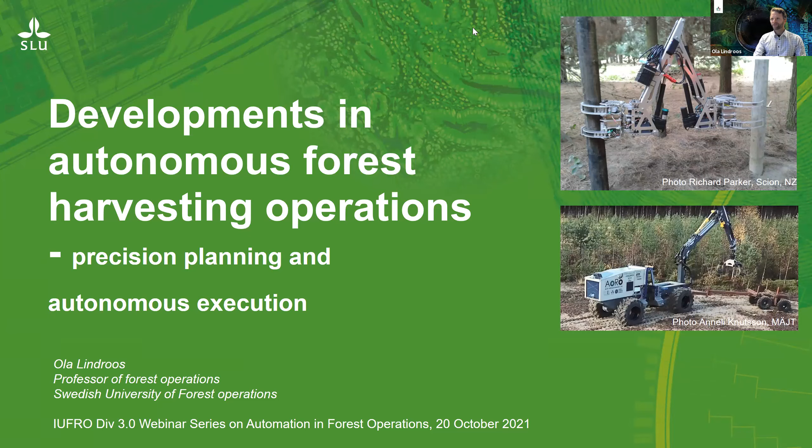I will be talking about developments in autonomous forest harvesting operations, looking at both the precision planning part, but I will focus on the autonomous execution part because that is what you might have seen less of in this business. So just a short context to set this up: digitalization and automation in forest operations has been a lot about jumping on the boom to have more and better data, to improve the planning and the execution in terms of different support. These are things that help and complement, or even replace, the work of the operators.

All this data and the improved planning can help operators execute operations better, or in really advanced versions, it can also replace the operator. So all these things are valid for normal onboard operations, all the way to teleoperated or semi-autonomous operations, and as we will see examples of here also, autonomous operations without any humans involved in the actual execution of the operations.

Looking at these two distinct parts, to understand the real differences here, I have divided into precision pre-planning, which is planning based on sensor data that has added functionality computed from the data - what can we use, what can we emphasize from this data? This can result in decision support for operators.

And it also gives input for the so-called pre-planning of automated operations, a plan how to do it. And then we have the autonomous execution, which is operations done without any operator input. This requires different kind of data than the pre-planning, because it requires data in real time and with a very high resolution.

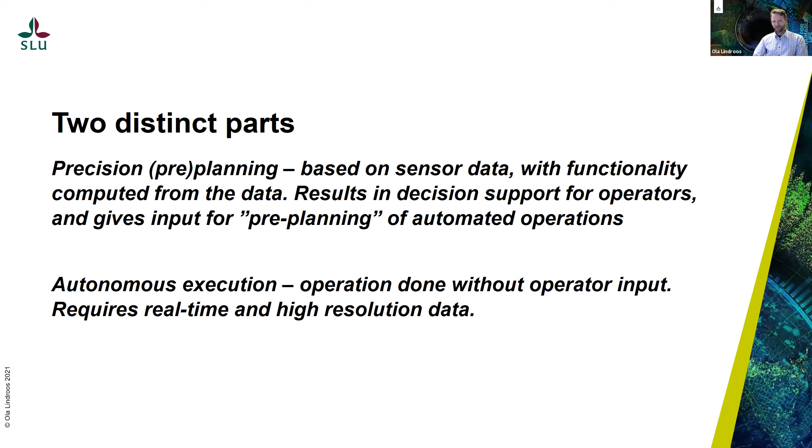So you can put it like this: precision pre-planning improves the automation, but it is not necessarily required for it. And the autonomous execution must be able to be managed without the pre-planning, but it is of course much improved if we have some kind of pre-planning.

And if you compare this with some kind of human context, you can compare it with a human driving with eyes closed, just trying to remember where to go based on a map, a pre-plan. And that would be the pre-planning.

And you compare that to how it is when you do it with your eyes open, but without a map. That would be the autonomous execution, but without pre-planning. So you see the difference. There's also complexity in the differences between the pre-planning and the execution part.

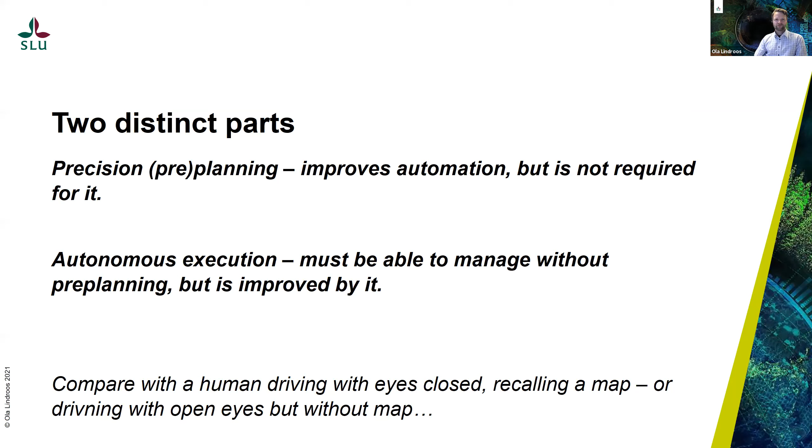So if you take first briefly the pre-planning, there are a lot of examples of that now because of the data we have. I'll take some examples from my own research and some other areas. That is computer vision, motion planning, and motion control, which is what you need in robotics. In the pre-planning, it's mainly focusing on computer vision and motion planning.

And that information is needed for knowing the position and the status of the components of the machine. It's needed for the knowledge of their own location, the location of the machine, what's around the machine, and also the plan for how to execute the work.

So these kind of elements are needed and used for pre-planning, and as I said, this can be used to support a human operator in the decisions that need to be made, or it can also later be used for a machine to take all the decisions.

One of the key issues here could be, for instance, the computer vision—how to identify objects in forestry. In some cases it's very easy when you have nice and good conditions; it's easy to see trees, ground and stems and so on.

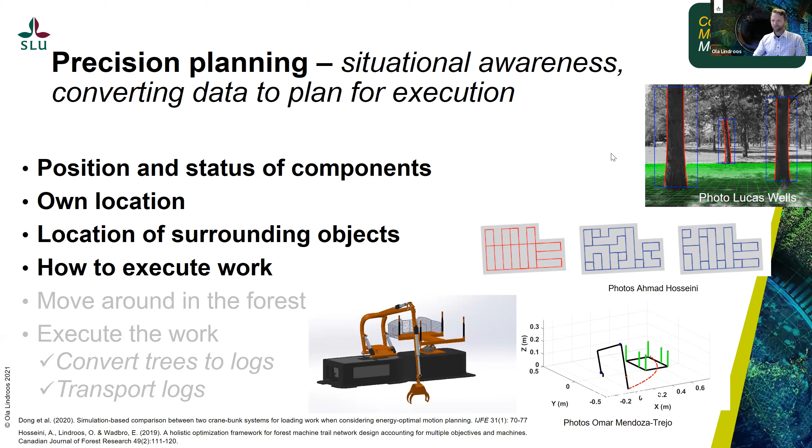But in many cases, our forests aren't that easy to distinguish. In some conditions it's difficult to see what is a stem and what is branches, etc. And it can be even worse, at least here in the north, like when you have snowstorms coming through and the sensors can be clogged with snow, and snow covering the objects on the ground, etc. So these are really challenging, but it's developing, of course.

Then we go to the autonomous execution, which is not so much worked on, and we will see examples of real applications here. Then we go to the more motion control part of robotics.

And of course the computer vision and motion planning is needed, but here a new element is also introduced: motion control, to really actually do the movements and the work. That is real-time control, and it's replanning of the pre-plans if there are such, based on the feedback on how the movements are performed.

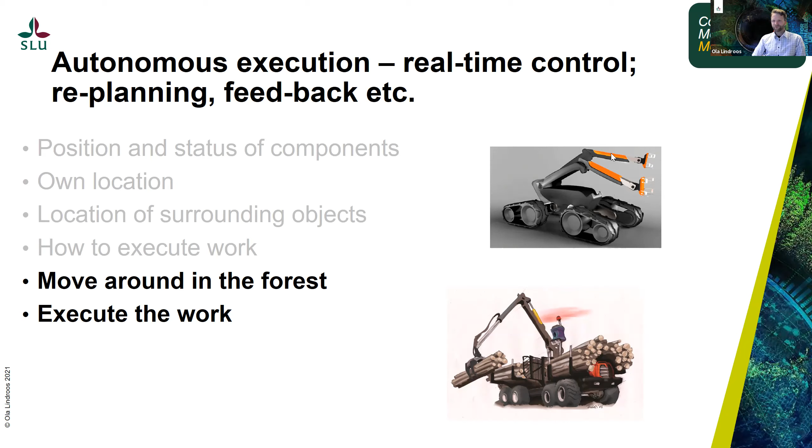And here you come to actions as basic as moving around in the forest and to execute the work. I will just briefly touch upon moving around in the forest, because that is quite common in other businesses also. There are questions about navigation, where to go, and trafficability.

How is it possible—if it's possible to go in certain places? And there are also different principles of how to do the movements. You have examples here of both walking machines and climbing machines that could be alternatives to wheels or tracks and such things. But this is happening quite a lot in other businesses also, and we have many examples.

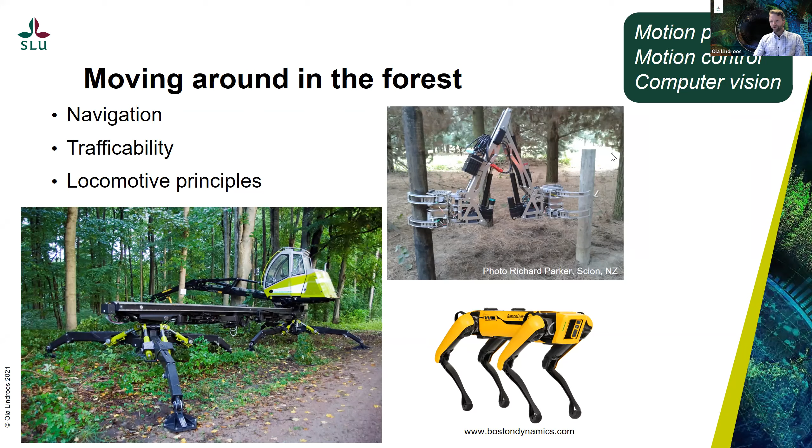So we will not focus on that in this presentation, because we will go more into the execution of harvesting work, which involves using actuators—in robotic language—and cranes in forestry language. That is what is commonly used to cut the trees, convert trees to logs, handle the logs, and transporting logs is not necessarily done by cranes, but it involves cranes to load, etc.

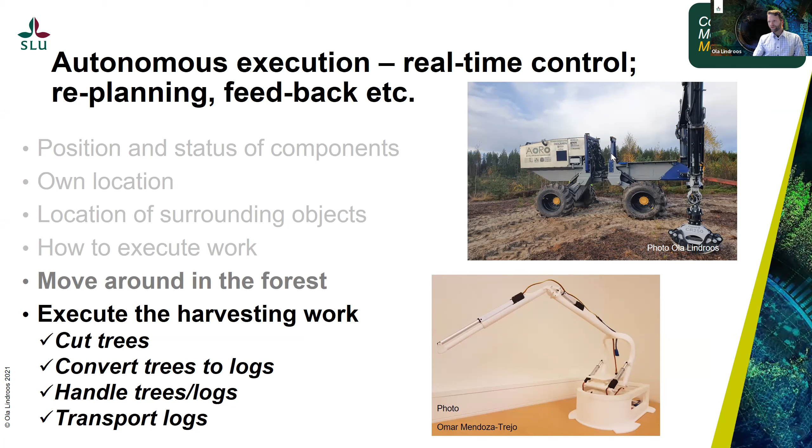We have in my group worked with cranes for more than a decade now, from different kinds of simulations to desktop models, and now lately also on full-scale cranes. We have worked previously on full-scale cranes, but now it's more in this kind of platform.

The platform you see in the picture is what we call in Swedish terrängfordonsplattformen, which translates to terrain vehicle platform. That was a project we initiated together with Luleå University of Technology, Engineering University, and through student projects this was started almost 10 years ago, first making the blueprints for the machine and then eventually building it and now having it fully functional. It's a platform for research on mobility, computer vision, actuation, etc.

It's possible to teleoperate it or to have it fully automated. It's medium-sized, if you would call it that. It weighs 10 metric tons, and it's built from more or less conventional components.

It's naturally sensorized, but many of the components are such that you could also find in other machines. It has a diesel engine, it has a Poclain drivetrain, and it's not really the one you might expect in a forest machine, based on it having pendulum arms and hydraulic hub motors, but otherwise no special components. It has a Cranab forwarder crane, also a conventional one that can be bought, which has sensors built into it.

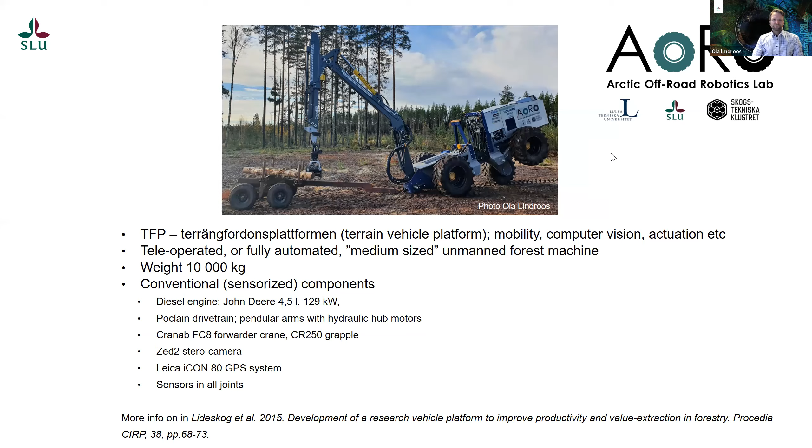So up until recently, we have had development part by part, so to say. These are some pictures showing what kind of work has been going on in the crane control department. Here, to the left, the crane is moved without the smart flow control system, and then you see the smoother movements with the smart flow control.

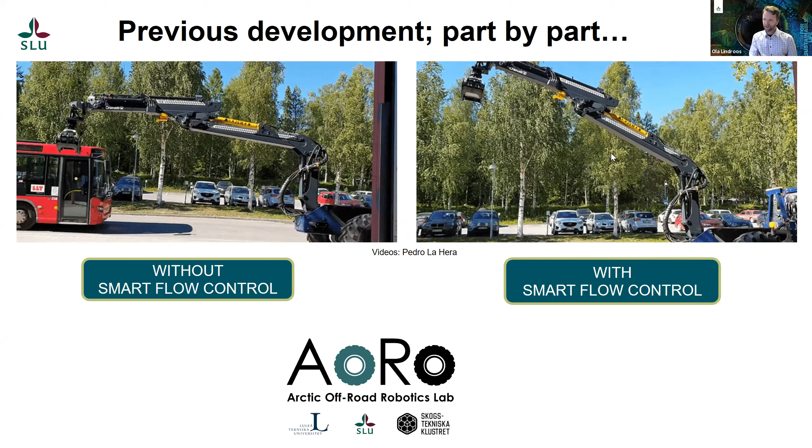This kind of system is really important for this platform, because the crane is really big compared to the vehicle. So if it's not properly adapted, the machine would more or less tip over or be very difficult to drive without these smooth movements. This has been going on for a long time, but we wanted to push it further.

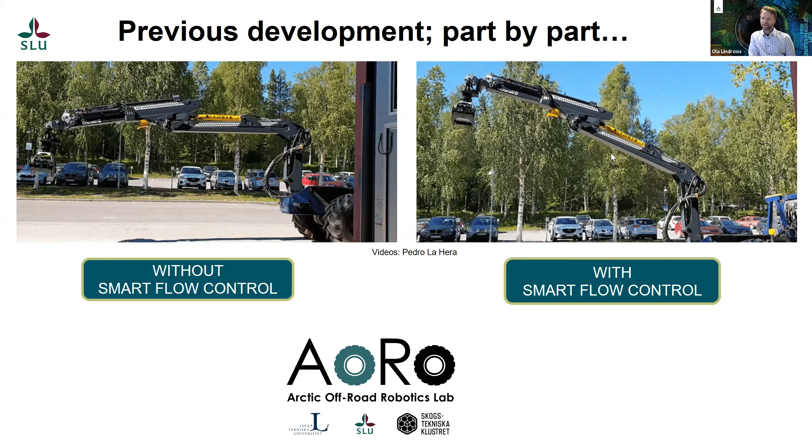So we set up a target this winter to have a full demonstration of autonomous work - to actually bring all the parts together, to have the navigation follow a path, to have the vision system find logs, and to have the crane system load logs, all working together. For that, we needed to develop some kind of distribution system to coordinate all of these actions, and we managed to do this.

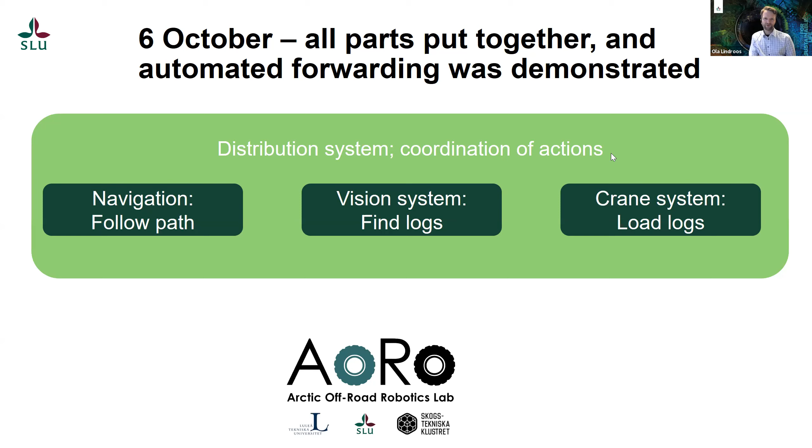It was really tough work to get it done in time. So you will see some demonstration in the video here, but keep in mind that this was really pushing it, and there's quite a bit of improvement still to be done on all of these aspects. I will show you what we did and talk you through it.

Here you see the machine moving. It's planned to follow a path, and it has a stereo camera in the front looking for logs. When it finds a log, it stops to get a better position, confirming: okay, the log is there.

Saving that position and then continue moving. It doesn't have any other sensors. So now it doesn't see the log, but it knows how long it should be driving to be in a good position to be able to pick up the log. So it's basically blind now.

It's just remembering where the log is. And now, once it's driven far enough, it stops. It will lower itself to be more stable when it loads.

And the crane starts moving to the position where the vision system found and positioned the log. So the crane movement is now located where the log is expected to be, closing until it feels the pressure of the log, and then it loads to a position behind the machine. It doesn't know where the trailer is, but it is adapted to let go of the log where the trailer is expected to be.

So if it were in a turn, for instance, it would miss the trailer in this setup. And then it continues, looking for logs until it reaches an end point.

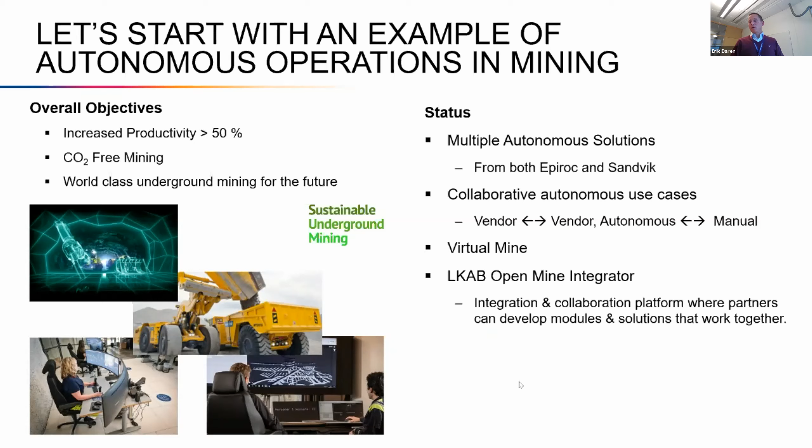Just to talk very quickly on how this was made possible, and to make it short, this is a partnership. Nobody could have delivered this on their own. So I guess the message on this slide is more that to tackle this, it's no point really to build autonomous solutions with only one company, because it's a bit like the telephone.

If you only have one telephone, you have no use at all. If you have two telephones, you can at least call each other. But if you have 3, 4, 5 telephones, then you can start making things happen. And it's a bit the same here. So we needed a partnership.

We've spent a lot of time to form and shape and work with this industrial partnership. And to be able to get there, we've had to work a lot with sort of, the picture you see on the screen is illustrating a vision, working with images like this, to make sure everybody interprets this in the same way and reaches the collaboration levels that are needed, so to speak.

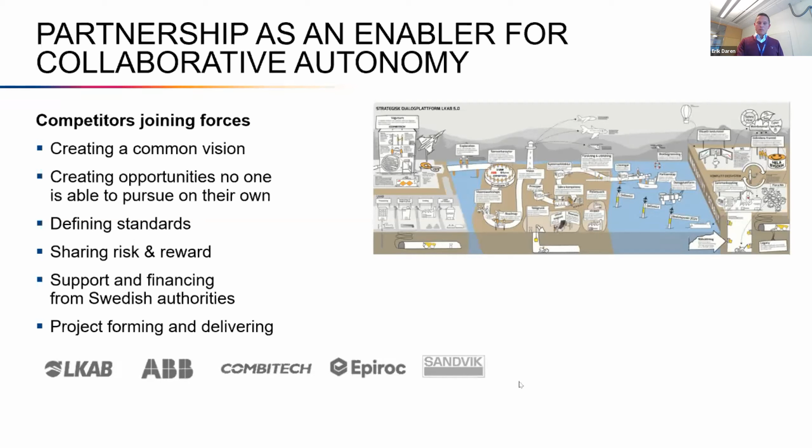I will move a little quickly here. I can share the material with the group afterwards, but of course, to make this happen, we have worked out together in the consortium a lot of different tools or methods or structured capital to actually be able to work together in an industrial partnership.

I'll come back to that, and I'll leave the floor to Martin to continue to talk a little bit more about autonomy as a concept and also in other industries. So Martin, please introduce yourself and speak, I will run the presentation from here.

Okay, thanks. Can you hear me? Yeah. Go back one slide, one click, Erik.

So I'm Martin Wright. I have a long history within the automotive business, and before Corona hit, I was the chief product manager for one of Volvo Trucks' 3 major autonomous projects, the one which focused on confined space. So I have a pretty good understanding of autonomy coming from mining as well here.

But one thing that was really apparent when we started talking with customers about what can be done within the autonomous field, it was always the same thing. All the focus was on the autonomous vehicles. That was the key to everything, and they are pretty cool, and that's where things are happening.

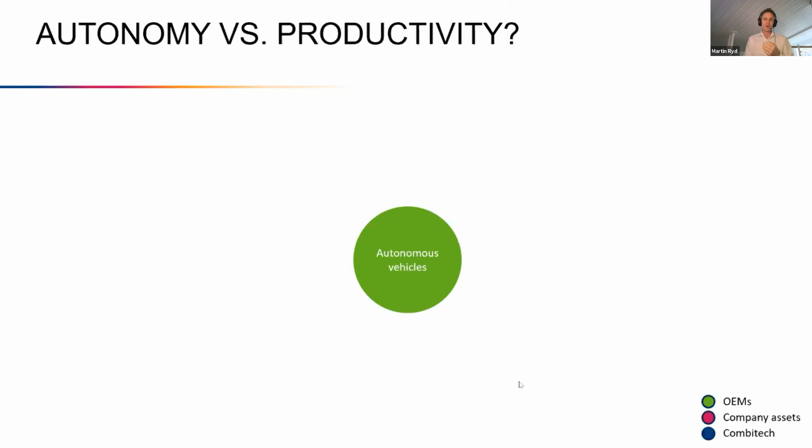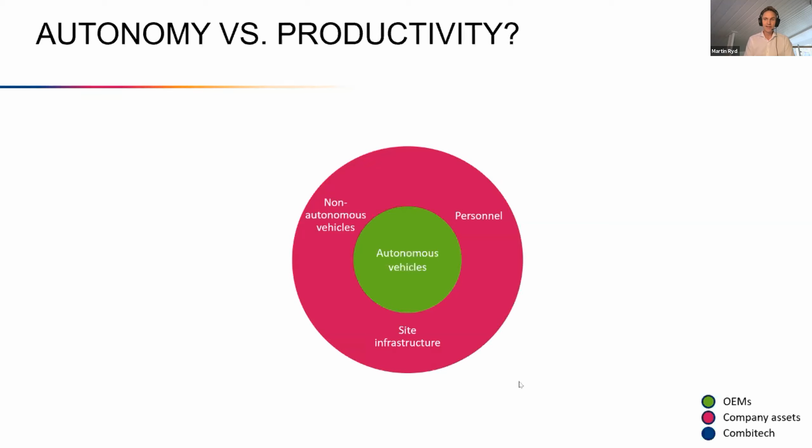But one thing that I learned kind of the hard way was that, okay, just one click Erik, suddenly when you start going autonomous, if you're in a confined space or if you're in traffic, you suddenly have a lot of non-autonomous vehicles to also consider, and you had personnel and you had site infrastructure as well. Erik, you can I think make 3 or 4 clicks because it's actually coming.

Yeah, stay there. And suddenly we also realized that it's not only autonomy, it's autonomous vehicles. It's really a complete system, because you also need to think about things like: can we be hacked? Can someone take over operations? Do we need remote operations? Can we do all the use cases without any intervention from a human? How do we control the vehicles in the best possible way with fleet management?

How do we integrate with all the other systems present on the site? How do we communicate between the different vehicles and the overall system? And last but not least, if being an OEM of an autonomous vehicle, how do we make sure not only the vehicles fulfill the safety standards of ISO 26262 functional safety or machine directive, but how do we make sure the whole site actually does it, and that the whole operations can fulfill it?

So autonomy is so much more than just autonomous vehicles. It's a complete system, and you need to apply systems thinking from the start. Another thing was that autonomous is definitely not a one-solution-fits-all.

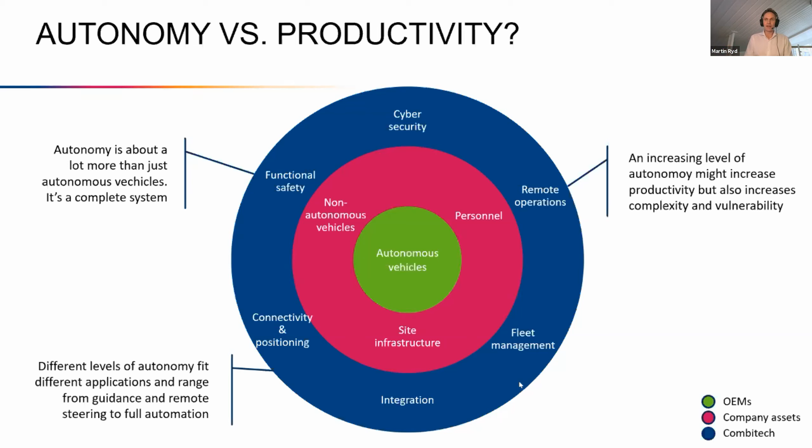But just to give you an example of systems thinking, one area we're working with—if you take the next slide—is harbor operations. This is a pretty neat confined space operation, and for greenfield operations you can make one part of the harbor autonomous, and the other one you can have vehicles coming in for being loaded and unloaded. So you don't need to have mixed traffic.

But if you go for brownfield operations, where you try to make an existing harbor autonomous, that's typically not the case. Just to give you a hint of what you see when you come to an autonomous harbor, if you don't want to use the AGVs that use transponders, but really try to make it more of an intelligent system.

You will have some kind of central mission or central hub where you have the fleet and mission management. You'll need simulation and site planning. This is just as true for a harbor as for mining, and I would expect that to be true for forestry too, where with the pre-planning Ola talked about before, you can definitely increase productivity and find the best way of running operations.

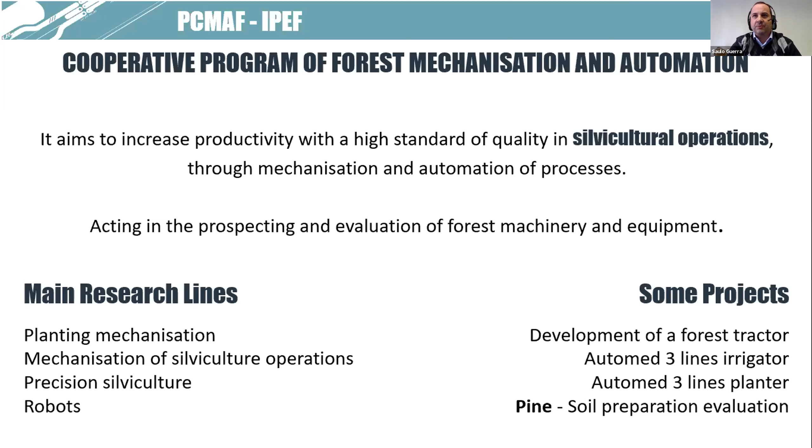We also work in partnership with different forest companies and manufacturers on the development of a forest tractor, automated three-line irrigators, and what we're going to see today, the automated triple line planter.

Our program, as Ola and some of the folks already know, the strategy of our Forestry Research Institute is a place where we have the university side, the forestry industry and companies, forestry manufacturers, machine manufacturers, implement manufacturers, and we have the triple helix in this Forest Research Institute.

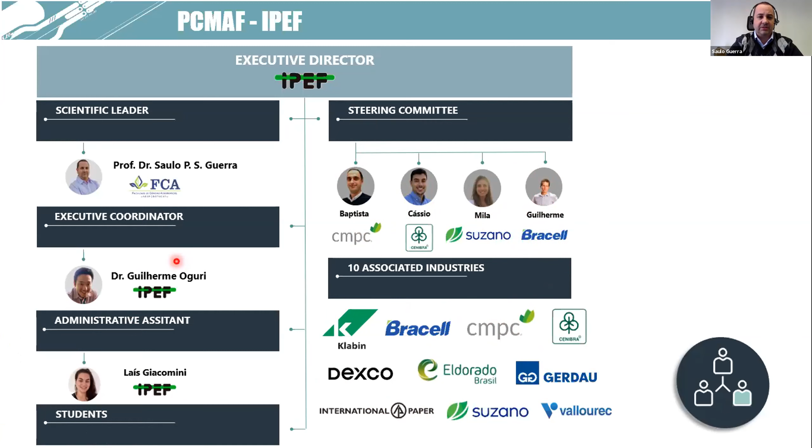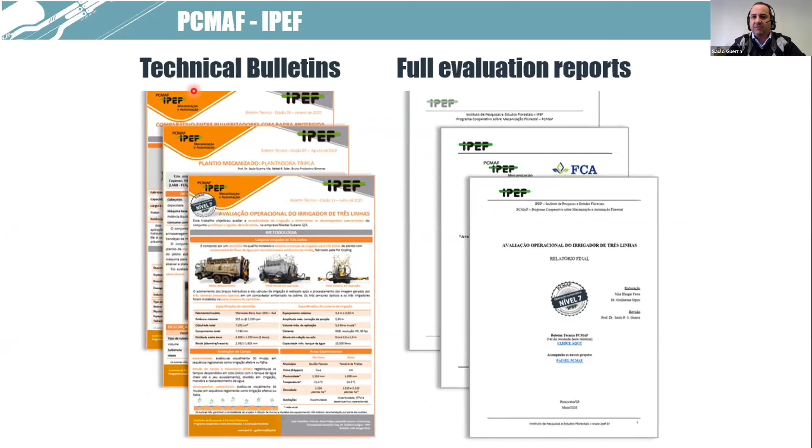In our case, we have established a partnership with 10 forestry companies, and representing these 10 forestry companies, we have four people, actually from CMPC, Cenibra, Suzano, and Bracell. We also have an executive coordinator and an assistant to lead and bring to you technical bulletins, evaluation reports, web news, online status, and when we have a chance, we go back to field days and demonstrations.

For you to know, this is the actual scenario for planting in Brazil. Most of the area is still manually planted here for eucalypt and pine plantations. One guy like this, one labor, is capable of planting 1 hectare per day manually, without any mechanical device, or with some mechanical device.

If it's not manual—and manual for us represents roughly today 65 up to 85% of the total worked area, as you will see later in my presentation—we move one level up and go into the semi-mechanized planting.

This is just one illustration of a very common implement typically used in Brazil for semi-mechanized planting. In this solution, we have one laborer in front of the tractor, driving it, and one guy behind, sitting on the implement. Those two guys are able to plant, and sometimes prepare plants, and sometimes also prepare, plant, and irrigate the soil or the ground, covering up to 3 hectares per day.

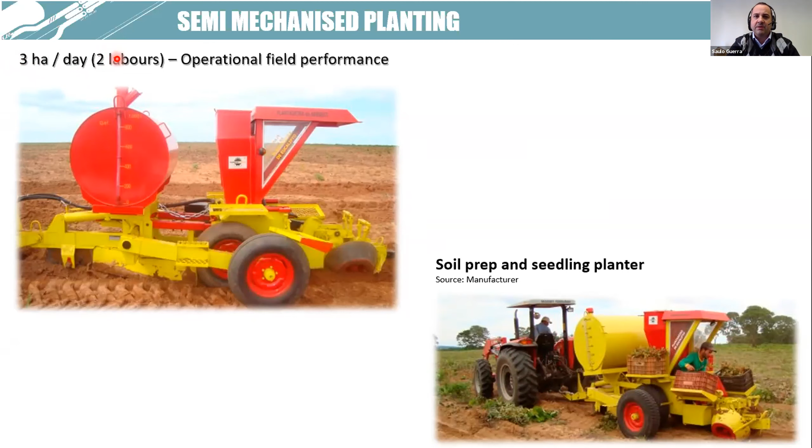So we shift from 1 hectare per day up to 3 hectares per day, moving from manual to semi-mechanized planting. A few years ago, we started to think about and evaluate mechanized planting systems in Brazil.

Luckily, we had a partnership at that time with a Swedish company, Bracke, a solution already known in Europe, China, and sometimes Indonesia. We brought this solution, and with the John Deere manufacturer, we established a new solution for Brazilian planted forests, where we had the Bracke planter with fertilizer buckets—a big deposit—and an extra water reservoir mounted on an excavator.

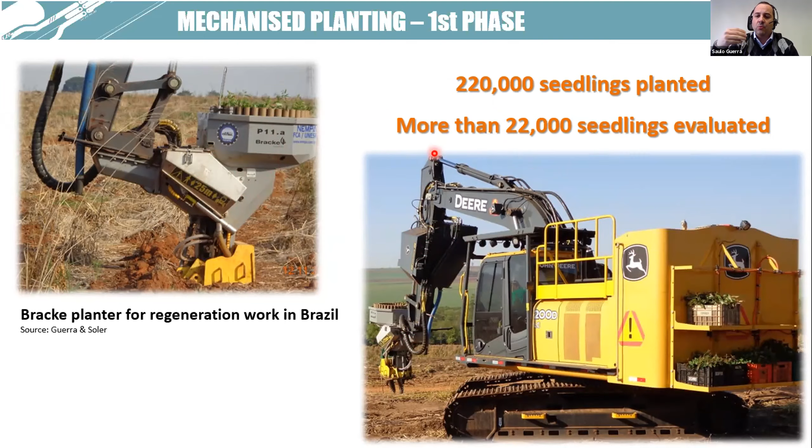And luckily we had a chance to plant more than 200,000 seedlings and evaluated more than 20,000 seedlings one by one on the ground. And with the forestry company, we were able to provide information to the manufacturer, and the manufacturer created and developed two different solutions for the Brazilian market and for the globe.

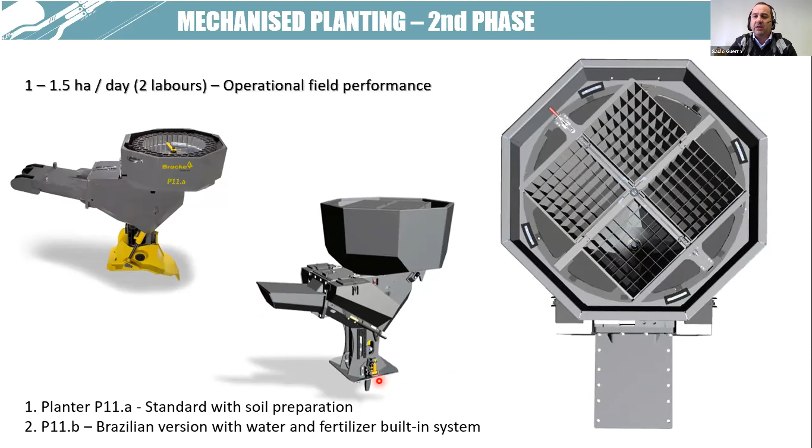Using that technology, we were able to go up to 1.5 hectares per day with 2 laborers, and that is real operational field performance. That is the newer header, the second phase of our evaluation, an evolution of the original OEM Bracke planter head. This unit has a higher, bigger carousel with more seedlings on it, the capability to plant and fertilize at the same time, and also you can add water during the planting operation.

So with that said, we had the chance to follow the first semi-mechanized or mechanized planting operation in South America with irrigation and fertilization at once, added to georeferencing position.

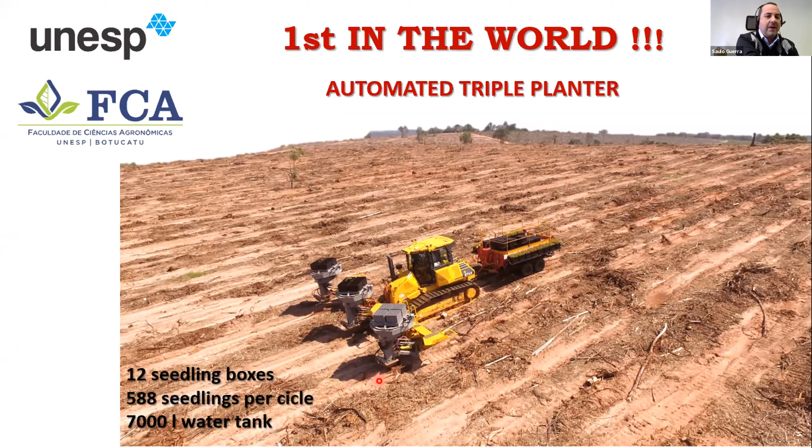But then we moved to the third phase, and the third phase happened with the Komatsu manufacturer, the Komatsu tractor manufacturer, and they brought a solution with 3 planters at once. Instead of using an excavator, they mounted the triple headers on a front boom. In this boom, we were able to install those 3 headers, 12 seedling boxes, and we were able to run close to 600 seedlings per cycle.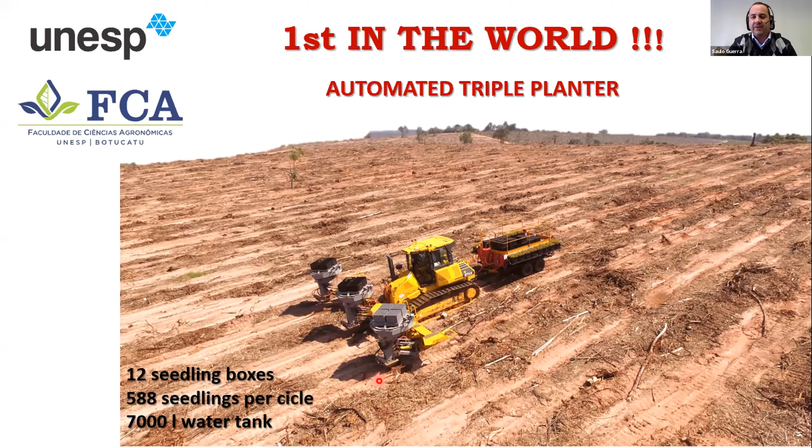This crawler tractor drags a 7,000-liter water tank with more seedlings to refill the automated triple planter. And luckily, we were the first to see in the world this machine running in a semi-autonomous mode. The machine is capable of running on the ground without human interference, stop, plant, irrigate, and move to the next planting site position without any human interference.

But prior to this, we need a very nice soil preparation. We have to have a deep soil, a deep subsoiling operation with GPS and a georeferencing system to create the path, to create the map for the triple planter, and precisely position the seedling on the following operation.

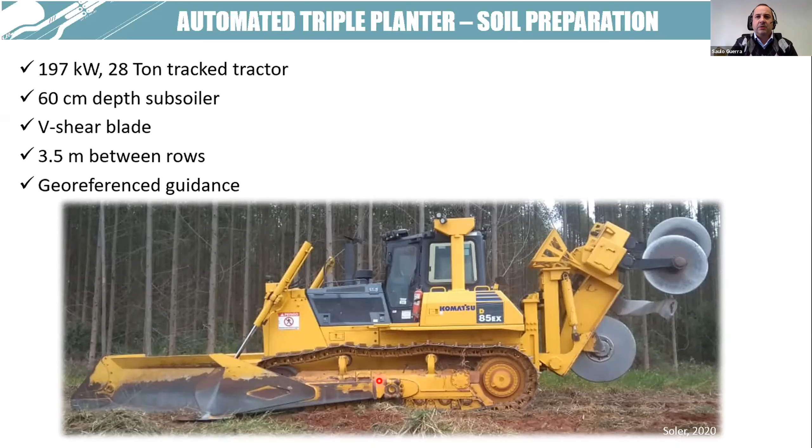So in our case, we are using a Komatsu bulldozer, the 85EX. It's more than 200 horsepower, close to a 30-ton tracked tractor. And we are using a Savannah subsoiler, 3.5 meters between rows, and a georeferencing system developed here in Brazil with Hexagon.

The Hexagon guys developed the controller in partnership with Komatsu, so we have right now the autopilot system customized for the triple planter. This controller also drives the hydraulic flow, the moving of the tracks, and the planting heads on the go. So the operator right now only needs to handle the maneuver at the boundaries and lift the upfront bar up and down when the operator sees, for example, a big stump or a stone or some obstacle that could not be controlled smoothly by the Hexagon controller.

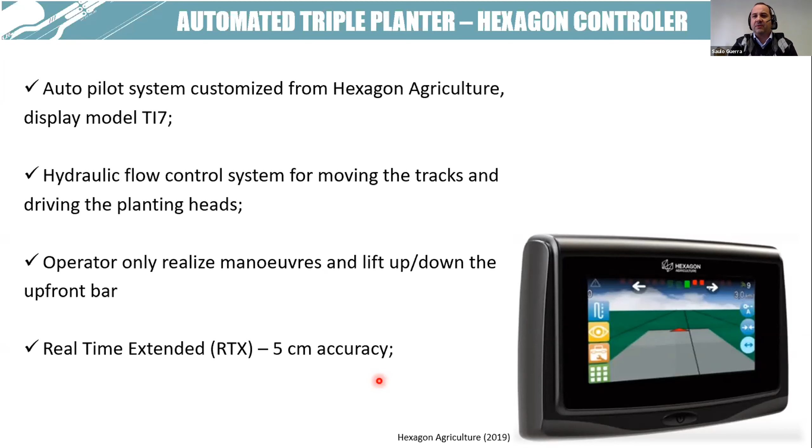And we are using real-time extended RTX with 5-centimeter accuracy for this machine. So the planter itself, using this top view, has 3 heads, and each head is capable of adjusting itself sideways up to 15 centimeters to the left or to the right. So even though sometimes the GPS could fail, or if there's a small relief or detour on the ground, the machine itself can adjust each header to plant properly in line according to the pre-mapped operation.

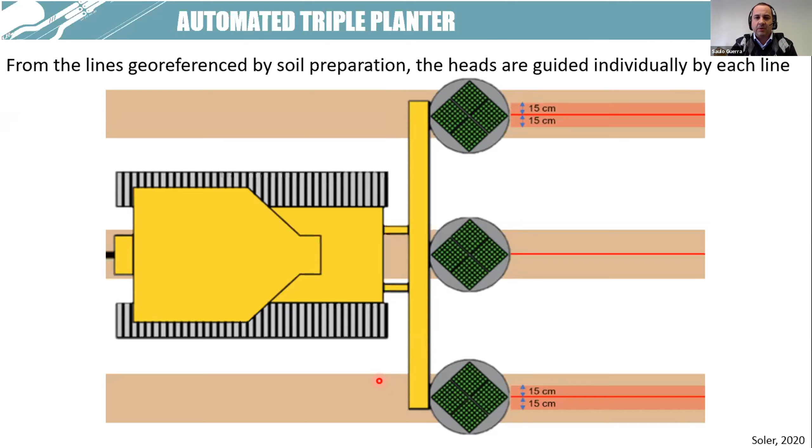The data I'm showing you right now is from the research area, from the experiment we carried out for almost 2 years. And this is way better right now, the machine is currently in operation. So the operational efficiency at that time, in field conditions but not really operational conditions with all the logistics involved in a real operation, was 46%.

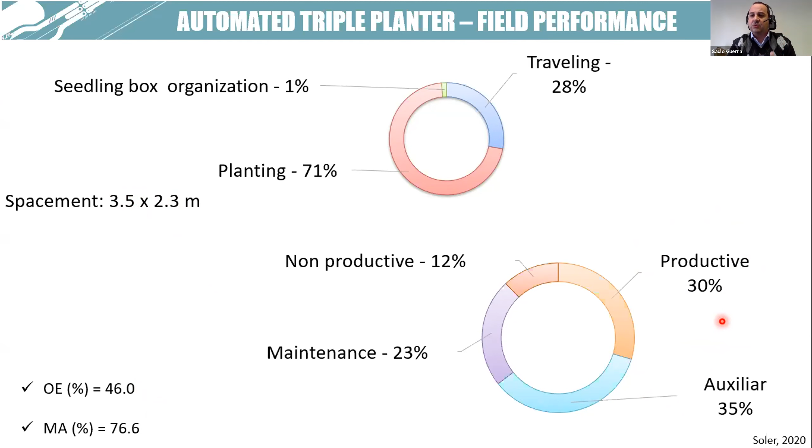And the machine availability at that time was close to 80%. So we were planting on a spacing of 3.5 by 2.3 meters, and we were able to reach 30% of the productivity time in that case, back in 2019 and 2020. Today, the machine is on the go.

So the costs and economic information I'm showing right now are from back in 2019, so take care with those numbers, because the diesel price is completely different than today. The diesel price 2 years ago, or 1.5 years ago, is maybe half or lower than half of the price it is right now. And also for the lubricants, and for us in Brazil, the real currency to dollar exchange rate is completely different.

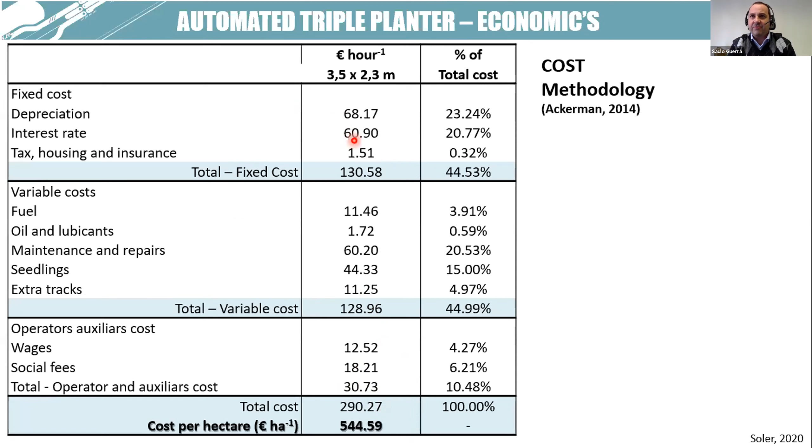Back in 2020, the cost per hectare using this technology was close to 500 euros per hectare, or 290 euros per hour. But take care, the numbers should be quite different today, including the depreciation cost and the interest rate. The economy in Brazil, and certainly in the globe, is a little bit wavy right now, so be very cautious with this number.

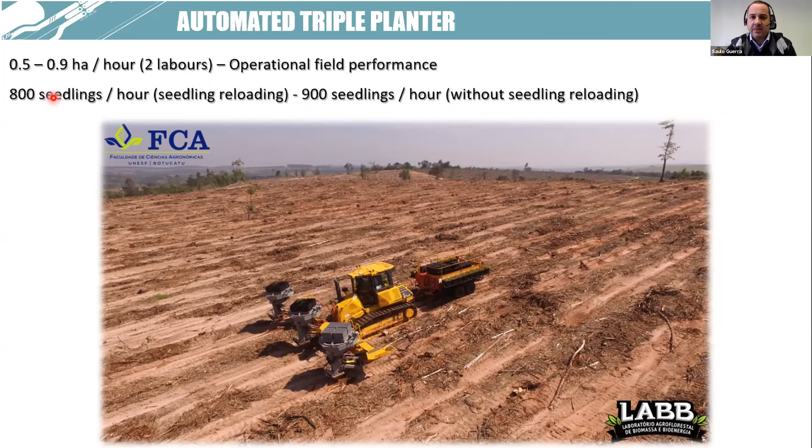Today, the machine on the go is working on a real operational scenario, and it's doing close to 1 hectare per hour. If you consider the operational planting productivity without seedling reloading, we can reach up to 900 seedlings an hour. But this isn't quite real, because we have to stop every 600 seedlings to reload and do the operation again. So if we consider the seedling reloading, we touch close to 800 seedlings an hour on real site conditions. I will try to show you the video.

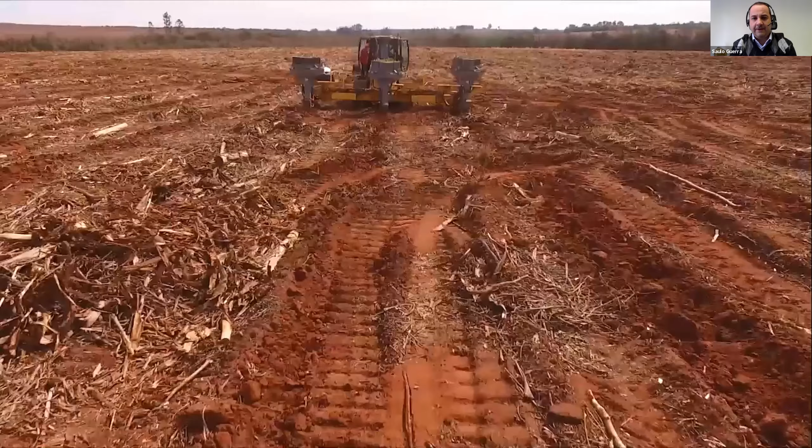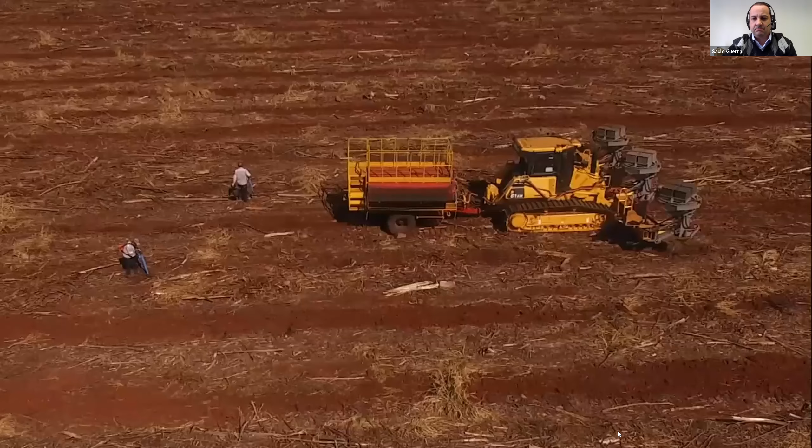I don't know if it will run properly for you, but the video will be on the web for you. Maybe it will just be images, not a video. This is the real scenario today, one commercial plantation. You can see the debris on the ground, some stumps, some logs, and you can have an overall illustration of the real machine working and planting. I think you won't be able to hear any sound - music is playing, but the idea is to show the overall soil quality, debris distribution, and the reality.

So this is what is going on in Brazil. This machine is not a prototype anymore - it's commercially available here in Brazil, and certainly we can deliver this technology to all the world.

I link this technology with our silviculture mechanization index survey. Our group has been providing this information during the last 4 years, and this 2020-2021 edition is in English, so you'll be able to read our index this time, and I brought the connection to the planter and the triple planter. In Brazil, this is totally actual, real data - it represents more than 50% of the Brazilian planted forest.

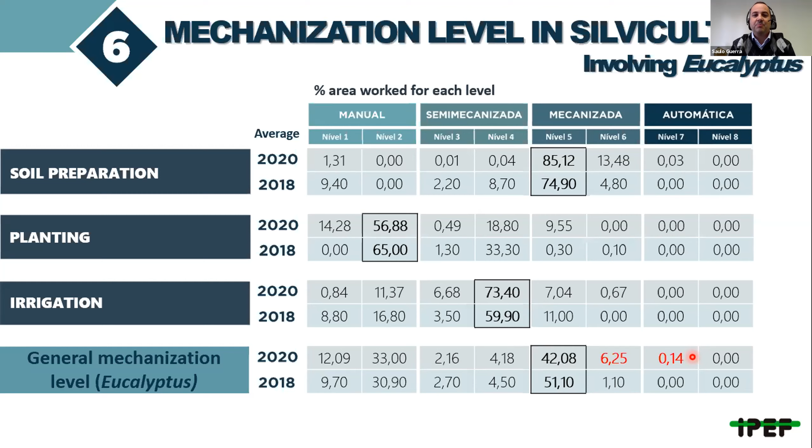Moving forward, luckily for your innovations, we are moving toward some level of autopilot and auto guidance. We currently have 0.14% of the area working with automation. So certainly by 2024, when you come with your robot, this number will be higher and will be right on time to deliver your technology to Brazil.

Coming up to the end of my presentation, just a taste of the numbers. This book represents 50.5% of the Brazilian planted eucalypt and pine, and our machines in terms of tractors are close to 2,500 tractors. 33% of the machine fleet belongs to forestry companies, and only 4 manufacturers have 83% of our market.

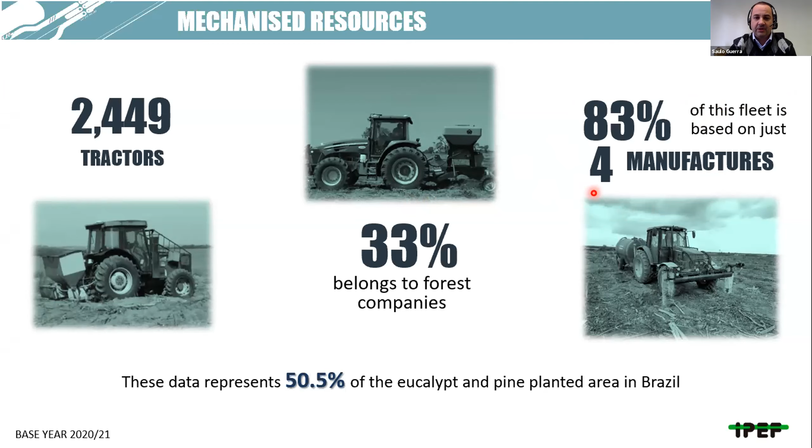If you want more details about those numbers, please check online at ipef.br/publicações, or publications in English, and you'll have the full book in Portuguese and English - this is free for your download.